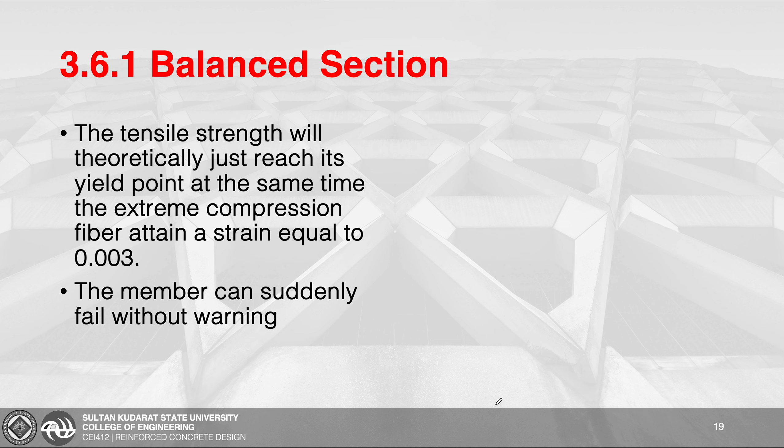So para ma-visualize natin yung strain diagram ng ating reinforced concrete na beam, ito yung cross section given na meron tayong width B tsaka yung effective depth. Let us say yung naka-green, ito yung location ng neutral axis under a balance condition. So ito na ngayon yung ating strain diagram. So first, ma-achieve ng ating concrete yung upper limit ng strain ng ating concrete sa compression, sa extreme na compression na fiber. And at the same time, yung strain ng ating tension steel will achieve the yield strain.

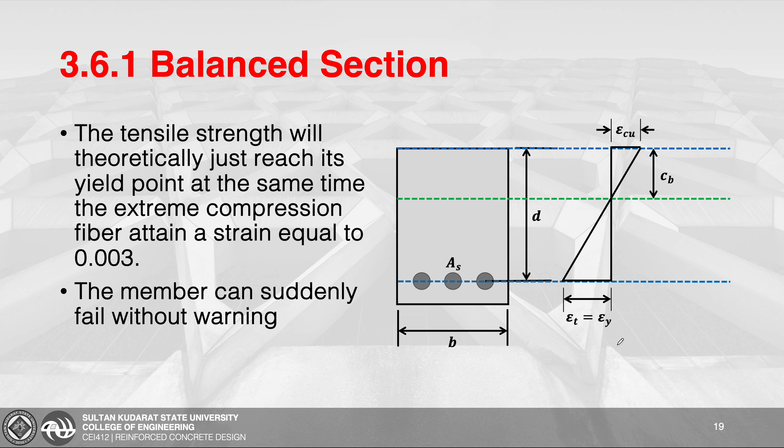So ito na ngayon yung ating strain ng ating reinforced concrete under balance condition. So another na section is what we so-called compression controlled or brittle na section. So as the load on such a member is increased, its deflection will usually not be particularly noticeable. So even though the concrete is highly stressed in compression, failure will probably occur without warning to users of the structure. So isa rin to sa mga iniiwasan na type ng design, especially sa ating mga beams. Kasi kung brittle yung ating section, hindi makikita yung pag-deflect ng ating beam, hindi makikita na mayroon na palang crack.

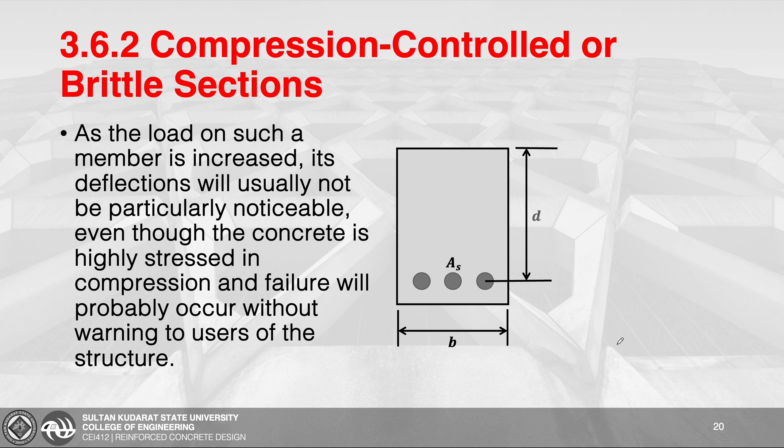So para ma-visualize natin yung strain diagram ng ating reinforced concrete na section under compression controlled na condition, first sketch muna natin yung balance condition na strain diagram. Okay, now usually yung location ng neutral axis natin for compression controlled is greater than the location ng neutral axis at balance condition. So if that is the case, yung magiging sketch ng ating strain diagram, considering na naka-fix tayo sa upper limit na strain ng ating concrete sa extreme na fiber, ito na ngayon yung ating diagram. So usually yung strain naman ng ating extreme na tension steel will be less than our yield strain.

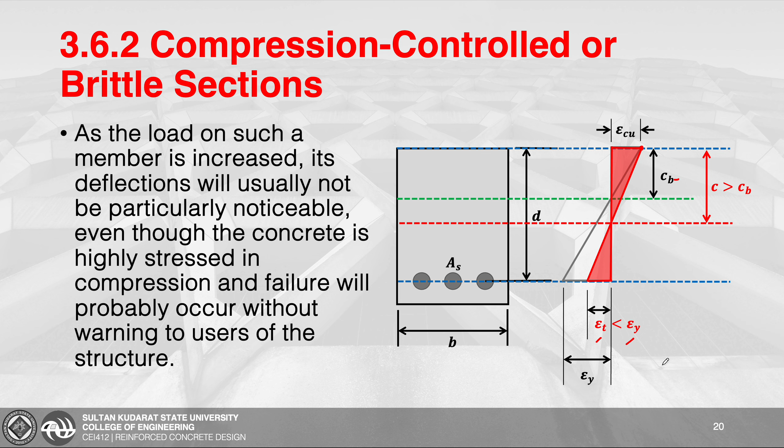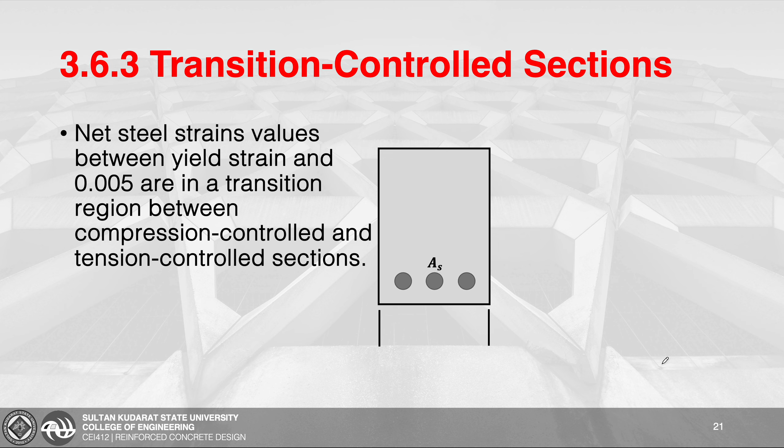So next naman is yung tinatawag nating transition controlled na sections. So under this, the net steel strain values between the yield strain and 0.005 are in a transition region between the compression controlled and tension controlled na sections. So para ma-visualize natin yung strain diagram ng ating transition controlled na section, first i-sketch natin ulit yung ating strain diagram at balance condition. So usually yung location naman ng neutral axis ng section natin under transition controlled na condition is medyo lower compared sa C-balanced. So if we're going to sketch our strain diagram nakafix tayo dito sa 0.003 na strain, then we draw a line na mag-intersect dito sa location ng ating neutral axis papunta dito.

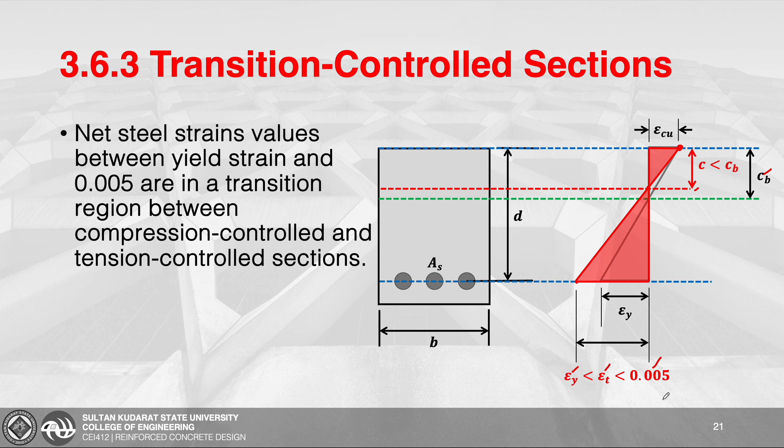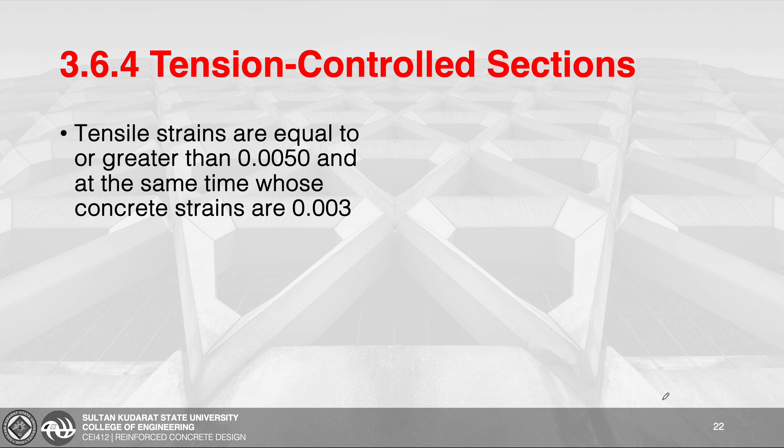So, usually, yung strain ng ating extreme na tension na steel will be greater than the yield strain pero less than 0.005. Then, yung last is yung tinatawag nating tension-controlled na sections. So, tensile strains are equal to or greater than 0.005 and at the same time, concrete strains naman are 0.003. Steel will yield before the compression side crushes and deflections will be large, giving users warning of impending failure. So ito yung ideal talaga na condition if you are going to design a reinforced concrete na beam. So dapat may warning, makikita talaga yung deflection which will give our users warning na meron ng failure.

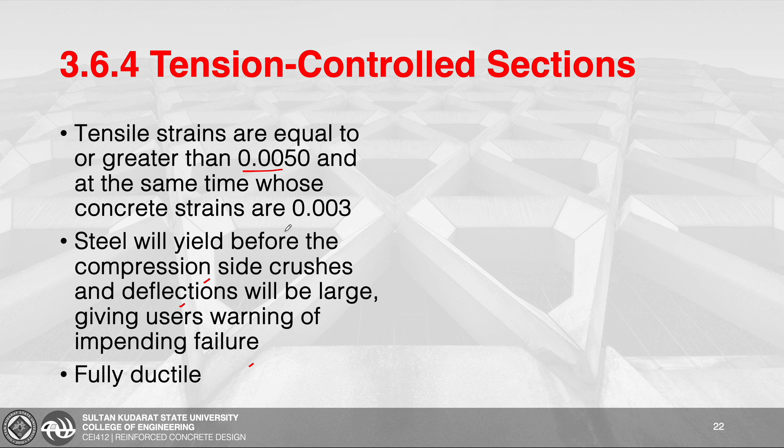So, also, since greater than or equal yung tensile strain natin sa 0.005, tinatawag din natin tong fully ductile na section. So, para ma-visualize natin yung strain diagram under tension-controlled na section, first, sketch muna natin yung strain diagram under balance condition. Then, usually, yung location ng neutral axis natin is lower na sa ating C balanced. That is the case if we're going to sketch our strain diagram. Yung strain ng ating extreme na tension steel will be greater than or equal sa 0.005 na strain.